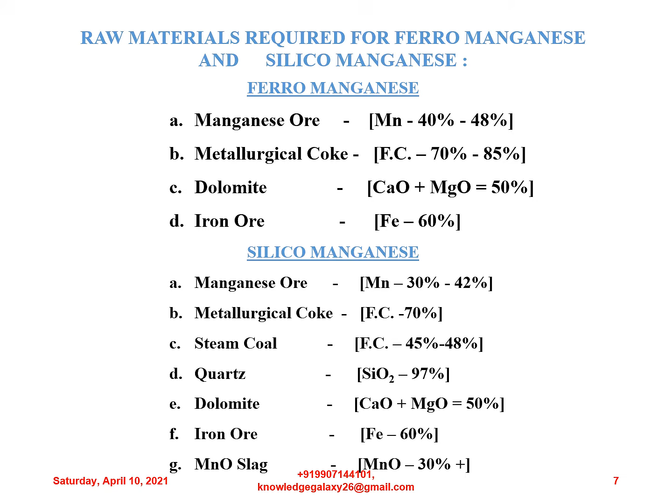manganese ore of manganese 30% to 42% is used. Metallurgical coke of fixed carbon minimum 70%. Steam coal of fixed carbon 45 to 48% is used. Quartz, SiO2 minimum 97%. Dolomite, CaO plus MgO total minimum 50%. Then iron ore of minimum iron 60%. High MnO slag, MnO minimum 30% plus, is used.

So friends, raw materials used for high carbon ferromanganese or silicomanganese production. These are manganese ores of the following grades. First grade, 46 to 49% manganese. Second grade, 42 to 46% manganese. Third grade, 35 to 42% manganese. While selecting the manganese ore, the average Mn/Fe ratio of the blend is kept between 4.2 to 5.5.

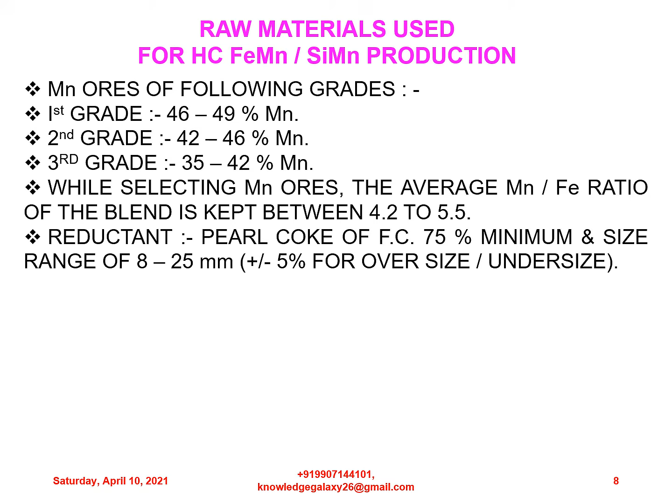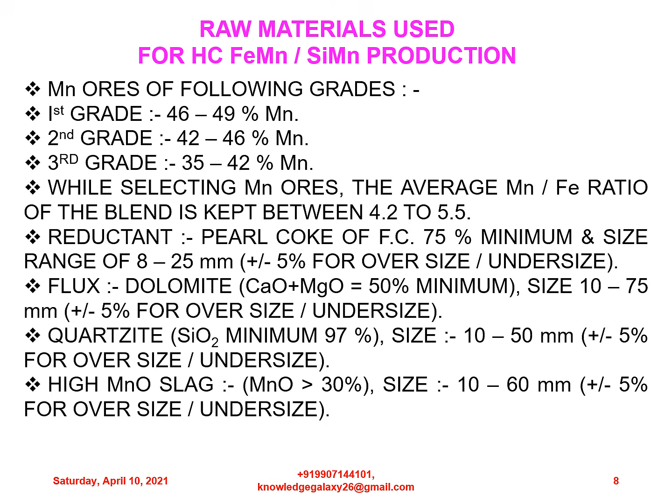Reductant: pearl coke of fixed carbon 75% minimum and size range of 8 to 25 mm, plus minus 5% for oversize or undersize. Flux: dolomite is used as a flux, CaO plus MgO minimum 50%, size 10 to 75 mm, plus minus 5% for oversize or undersize. Quartzite, SiO2 minimum 97%, size 10 to 50 mm, plus minus 5% for oversize or undersize. High MnO slag, MnO more than 30%, size 10 to 60 mm, plus minus 5% for oversize or undersize.

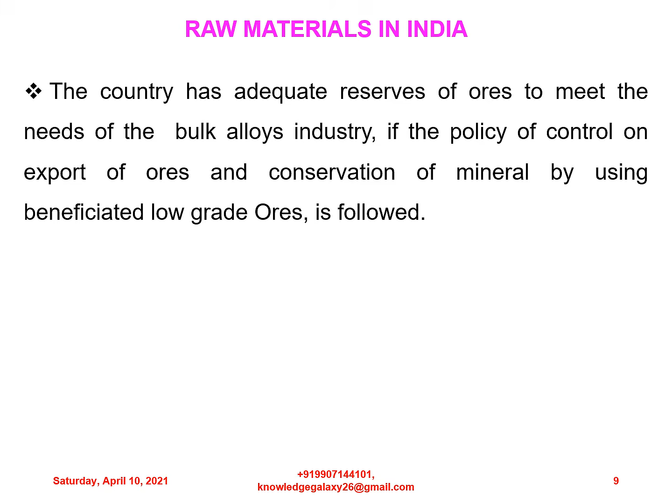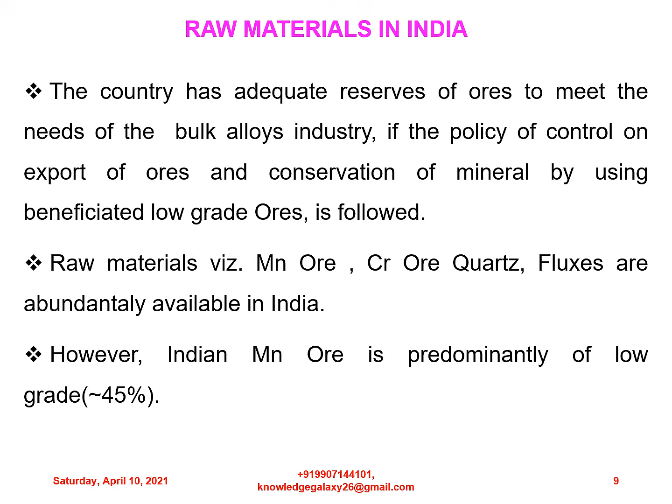Raw materials in India. The country has adequate reserves of ores to meet the needs of the bulk alloys industry if the policy of control on exports of ores and conservation of mineral by using beneficiated low-grade ores is followed. Raw materials like manganese ore, chrome ore, quartz, and fluxes are abundantly available in India. However, Indian manganese ore is predominantly of low grade, equivalent to 45%.

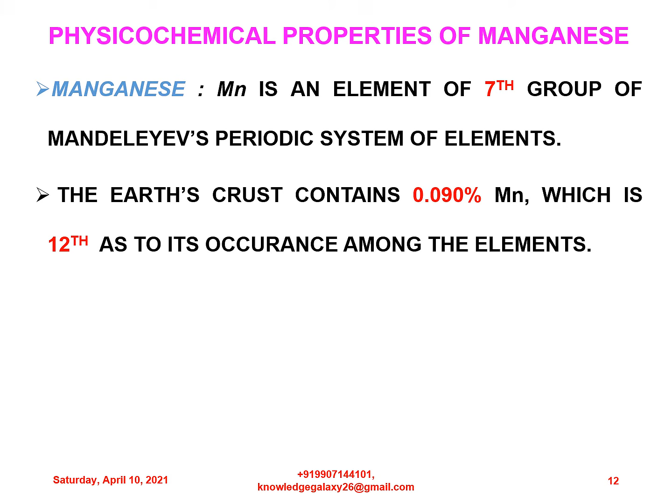Let us now discuss something about physico-chemical properties of manganese. Manganese is an element of the 7th group of Mendeleev's periodic system of elements. The Earth's crust contains 0.090% of manganese, which is 12th as to its occurrence among the elements. Manganese is not found in elementary state in nature and occurs only in the form of compounds with other elements. These are mainly oxides, carbonates, and silicates.

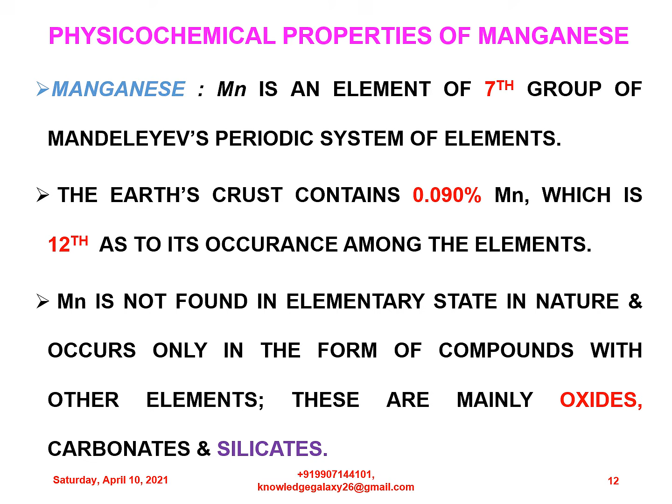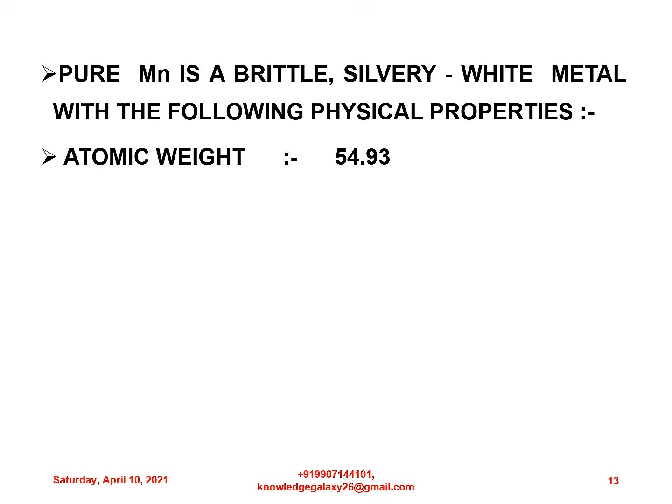Pure manganese is a brittle, silvery white metal with the following physical properties. Atomic weight is 54.93, specific gravity is 7.2, melting point is 1244 degrees Celsius, boiling point is 2150 degrees Celsius, valency is from 2 to 6. Manganese possesses a very strong affinity to oxygen and sulfur.

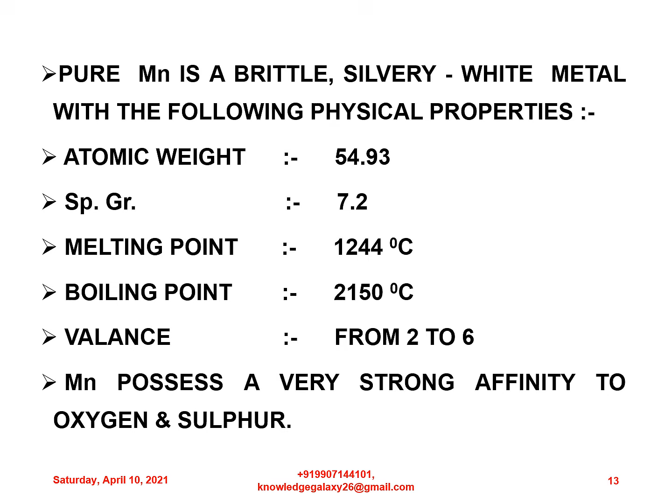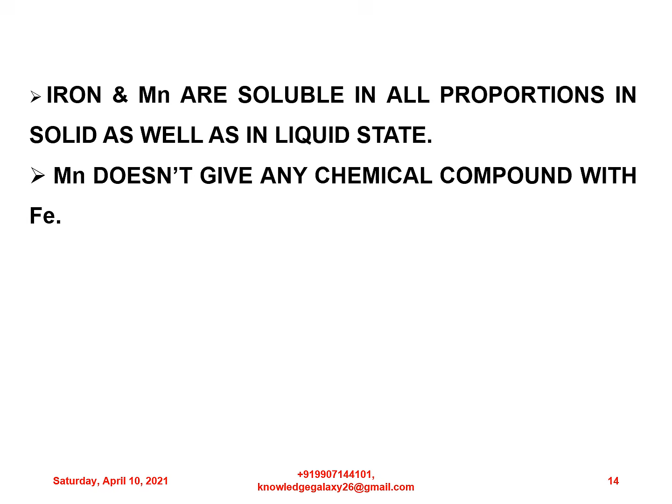Iron and manganese are soluble in all proportions in solid as well as in liquid state. So it can be said that iron and manganese are very much close friends. Manganese doesn't give any chemical compound with iron. Manganese combines with carbon to give a stable carbide, that is Mn3C. Mn3C and liquid manganese are soluble in all proportions.

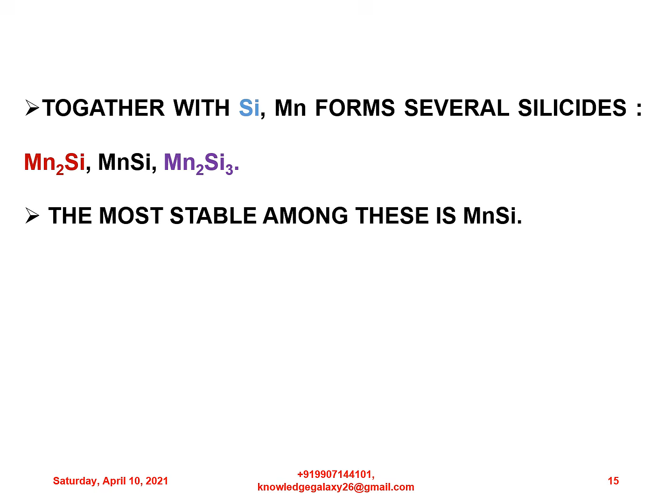Together with silicon, manganese forms several silicides: Mn2Si, MnSi, Mn2Si3, etc. The most stable among these is MnSi. Silicides of manganese are stabler compounds than Mn3C, since the heat of formation of MnSi from the elements is 14,000 calories, while that of Mn3C is 3,600 calories.

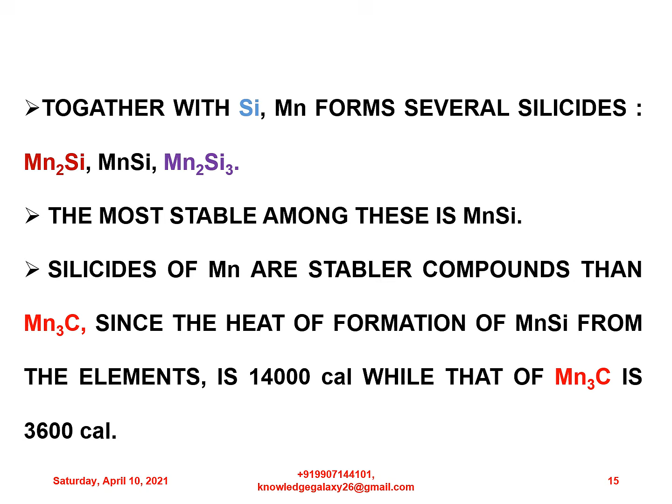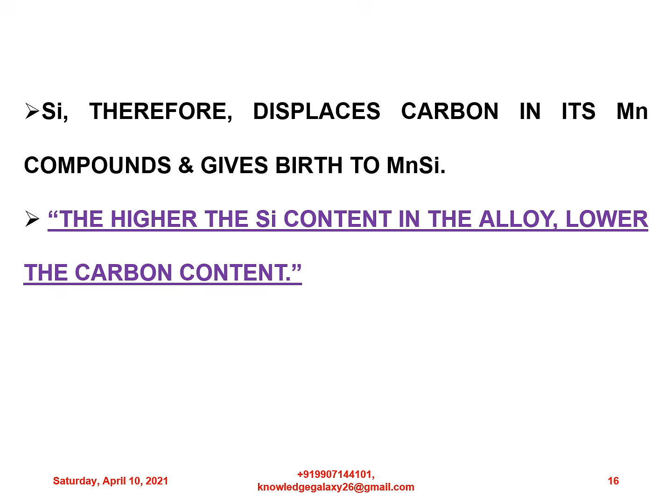Silicon therefore displaces carbon in its manganese compounds and gives birth to MnSi. The higher the silicon content in the alloy, the lower the carbon content. My dear friends, this is the principle governing production of silicomanganese and ferromanganese with low carbon content. So you should always remember this.

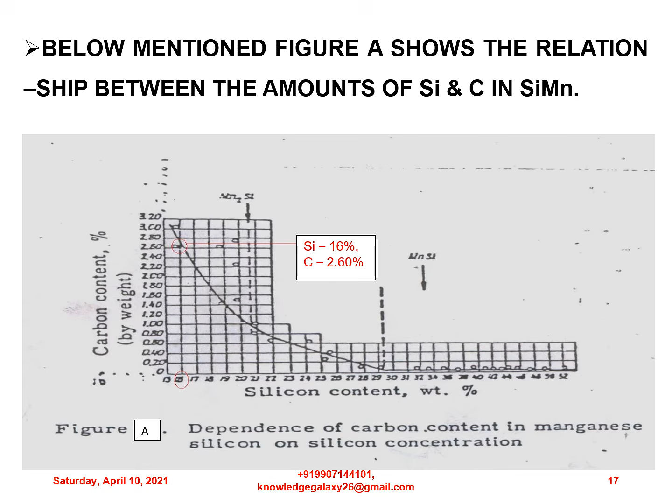This graph shows the relationship between silicon and carbon in the silicomanganese. As can be seen, the optimum silicon content, that is 16%, carries carbon up to 2.6% maximum. Manganese forms 4 compounds with oxygen: manganese monoxide MnO, manganese protoxide Mn3O4, manganese oxide Mn2O3 and manganese dioxide MnO2.

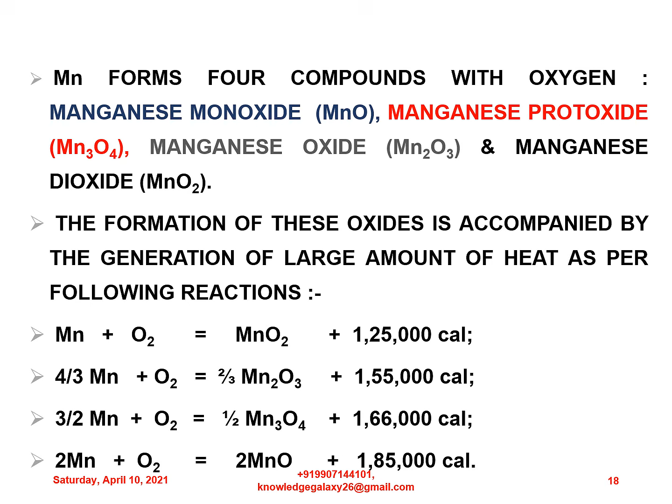The formation of these oxides is accompanied by the generation of large amount of heat as per the following reactions. First, Mn + O2 = MnO2 + 1,25,000 calories. 4/3 Mn + O2 = 2/3 Mn2O3 + 1,55,000 calories. 3/2 Mn + O2 = 1/2 Mn3O4 + 1,66,000 calories, and 2 Mn + O2 = 2 MnO + 1,85,000 calories.

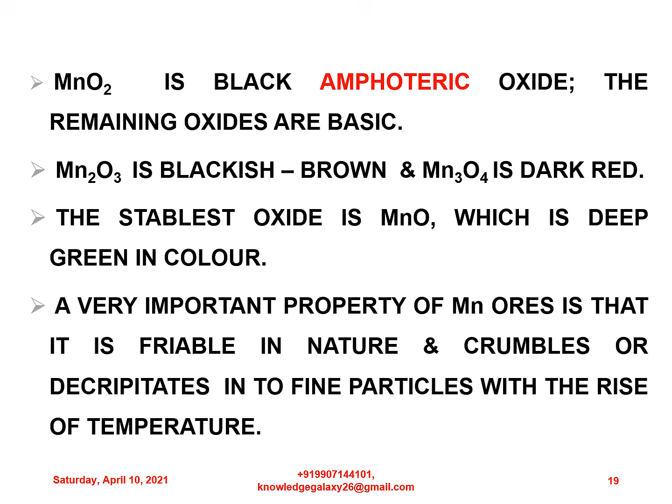MnO2 is a black amphoteric oxide. The remaining oxides are basic. Mn2O3 is blackish brown and Mn3O4 is dark red in color. The stablest oxide is MnO, which is deep green in color. A very important property of manganese ores is that they are friable in nature and crumble or decrepitate into fine particles with the rise of temperature.

The former Soviet Union accounts for more than 50% of the world's reserves of manganese ores. The largest deposits of these ores are in the Chiatura area in the Caucasus and the Nikopol area in Ukraine. It should be stressed that manganese ores are one of the chief sources of raw materials used in extractive metallurgy. Over 90% of the world manganese ore output goes to the metallurgical industry.

The main manganese minerals are: pyrolusite MnO2, a mineral black in color. Second, manganite Mn2O3.H2O, it is steel grey in color. Third is psilomelane MnO, BaO, CaO, MgO·MnO2·nH2O. This is light steel in color. Hausmannite Mn3O4, which is brown to black in color. Braunite Mn2O3, it is brown to black in color.

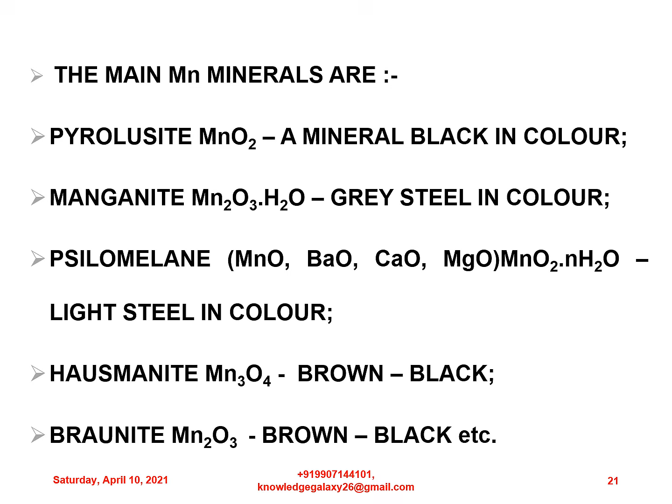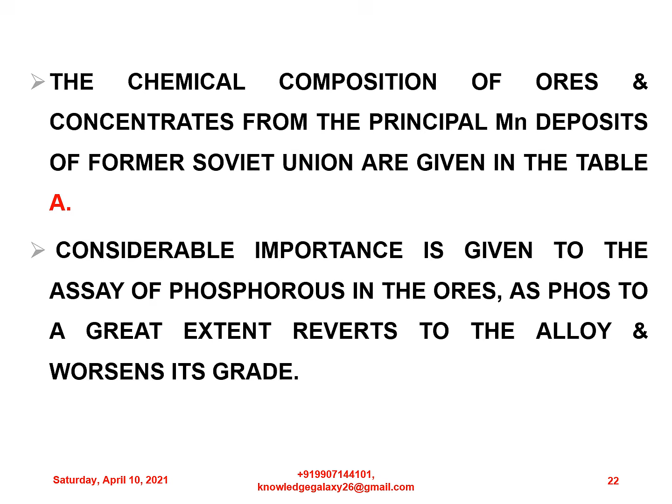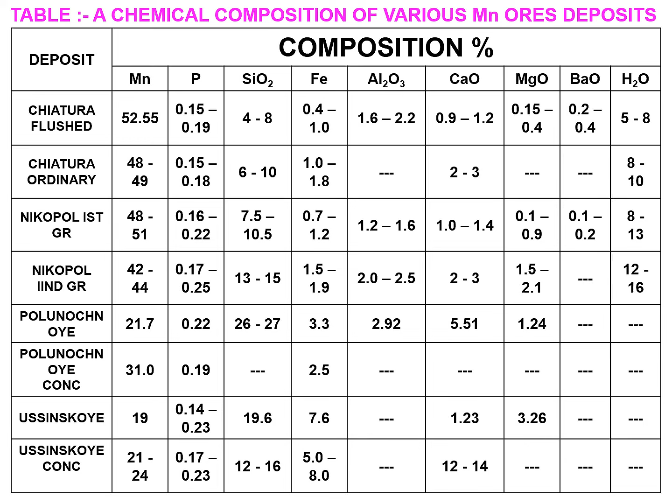The chemical composition of ores and concentrates from the principal manganese deposits of the former Soviet Union is given in the table. This is basically for theoretical importance and extra knowledge sharing. Considerable importance is given to the assay of phosphorus in the ores, as phosphorus to a great extent reverts to the alloy and worsens its grade. This table basically shows the chemical composition of various manganese ore deposits. So the details you can see in this slide.

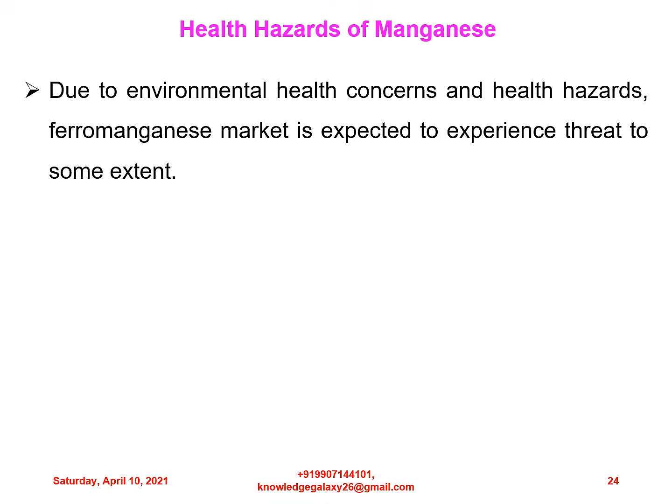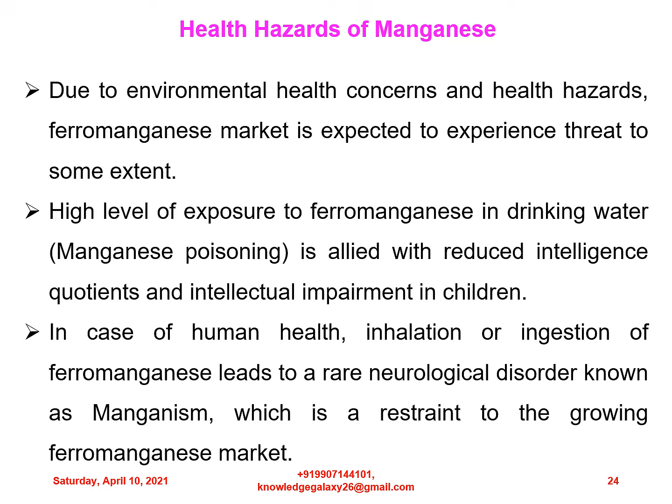So let us now discuss something about health hazards of manganese. Due to environmental health concerns and health hazards, the ferromanganese market is expected to experience threat to some extent. High level of exposure to ferromanganese in drinking water, that is called manganese poisoning, is allied with reduced intelligence quotient and intellectual impairment in children. In case of human health, inhalation or ingestion of ferromanganese leads to a rare neurological disorder known as manganism, which is a restraint to the growing ferromanganese market.

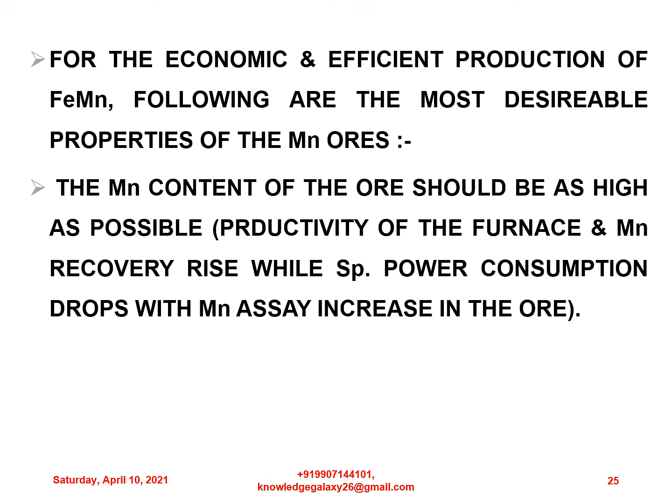For the economic and efficient production of ferromanganese, following are the most desirable properties of the manganese ore. The manganese content of the ore should be as high as possible. Productivity of the furnace and manganese recovery rise while specific power consumption drops with the manganese assay increase in the ore. Second, Mn/Fe ratio should be as high as possible. This is one of the prime factors that determines the grade and quality of manganese ore.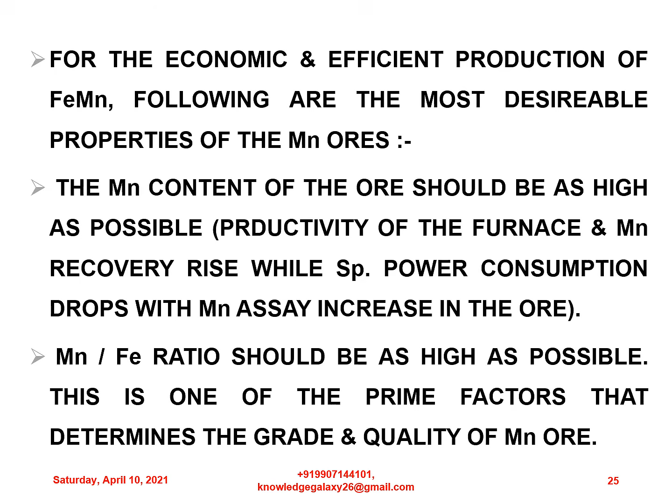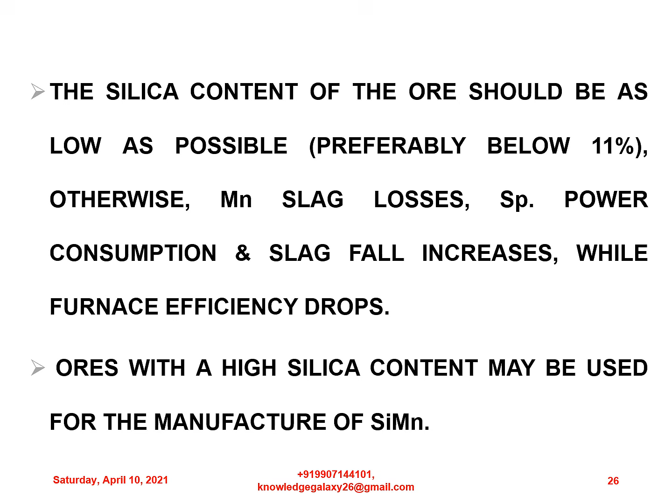The silica content of the ore should be as low as possible, preferably below 11%. Otherwise, manganese slag losses, specific power consumption, and slag fall increase while furnace efficiency drops. Ores with a high silica content may be used for the manufacture of silicomanganese. Ordinary manganese ores are used for the manufacture of metallic manganese in electric furnaces, while only very rich and pure uncontaminated manganese ores may be used for the aluminothermic method.

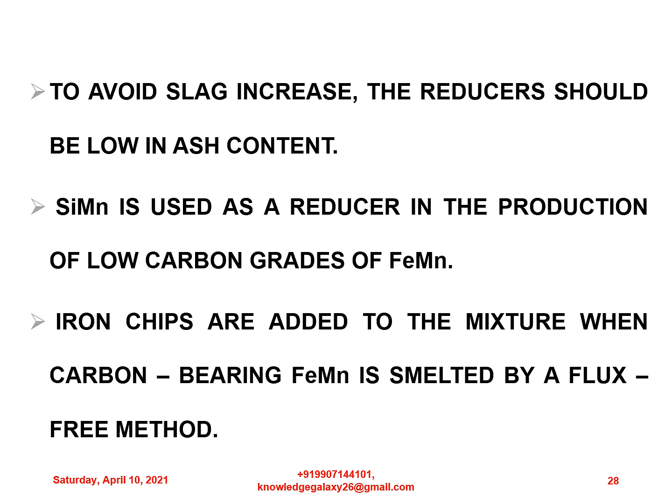Fine metallurgical coke and coal are used as reducers in the smelting of carbon ferromanganese and silicomanganese. Quartzites are used in the manufacture of silicomanganese to ensure a standard silicon content in silicomanganese. To avoid slag increase, the reducers should be low in ash content. Silicomanganese is used as a reducer in the production of low carbon grades of ferromanganese. Iron chips are added to the mixture when carbon bearing ferromanganese is smelted by a flux free method.

Let us now discuss about typical analysis of raw materials used in manganese alloys production. My dear friends, this table shows the major ore sources and their typical analysis, which is used for high carbon ferromanganese and high carbon silicomanganese production across various producers in India.

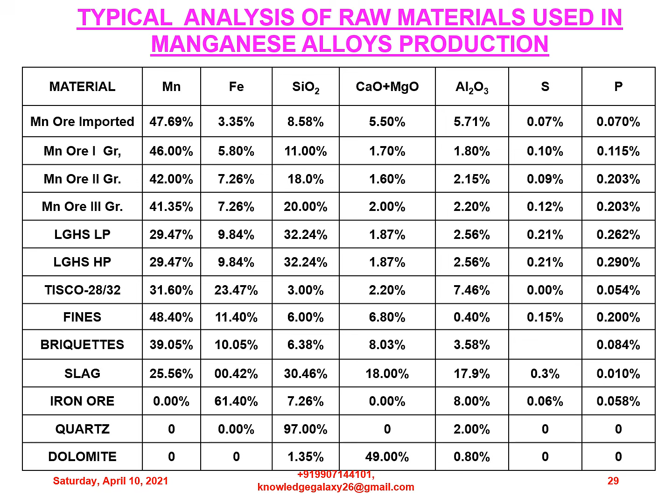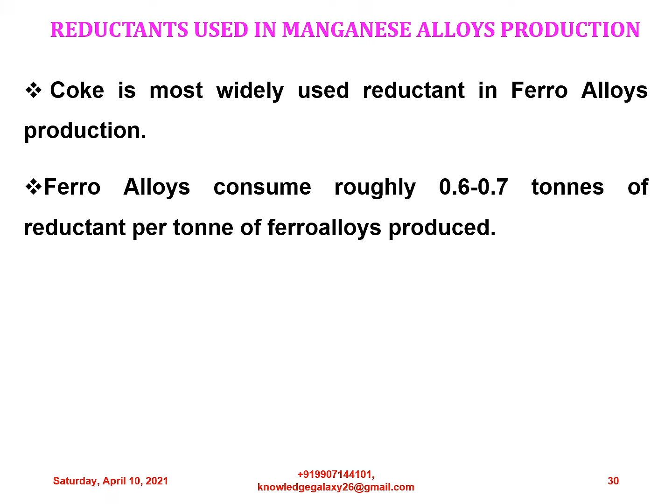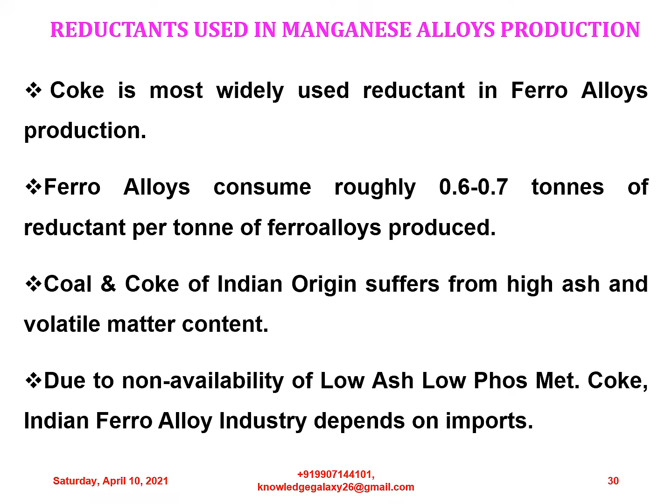Let us now discuss something about reductants used in manganese alloys production. Coke is the most widely used reductant in ferroalloys production. Ferroalloys consume roughly around 0.6 to 0.7 tons of reductant per ton of ferroalloys produced. Coal and coke of Indian origin suffer from high ash and volatile matter content. Due to non-availability of low ash, low phos metallurgical coke, the Indian ferroalloy industry depends on imports.

Stricter environmental controls in many countries have also put merchant coke batteries under long-term threat of closure. Increased demand for coke in China and curtailment of coke exports has led to shortage of coke in India. High and rising coke costs globally. This is also a very big threat for the Indian manufacturers.

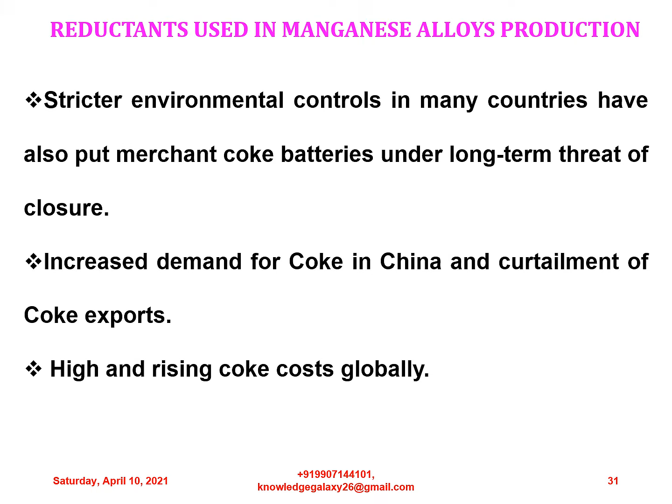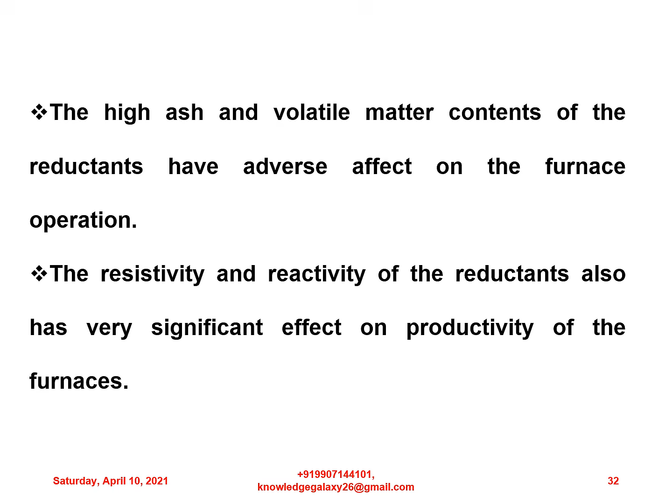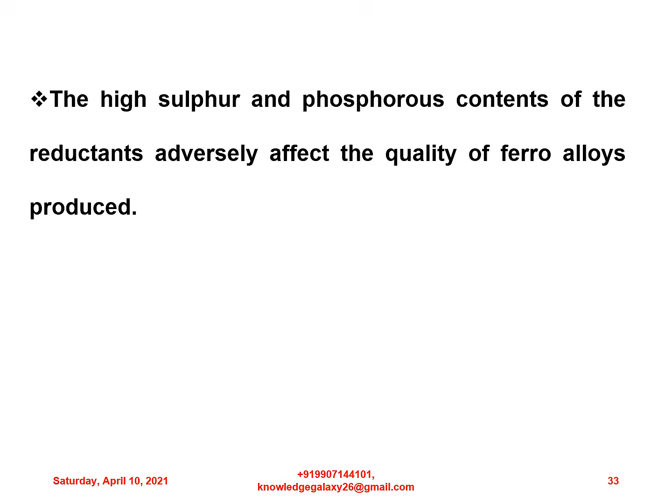The high ash and volatile matter contents of the reductants have adverse effect on the furnace operation. The resistivity and reactivity of the reductants also have very significant effect on productivity of the furnaces. The high sulfur and phosphorus contents of the reductants adversely affect the quality of ferroalloys produced. Metallurgical coke from steel plants and other coke making plants along with non-coking coal are used for the production of manganese alloys.

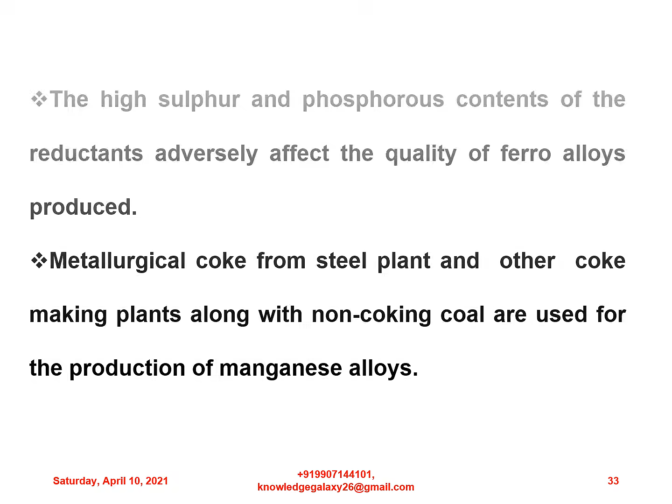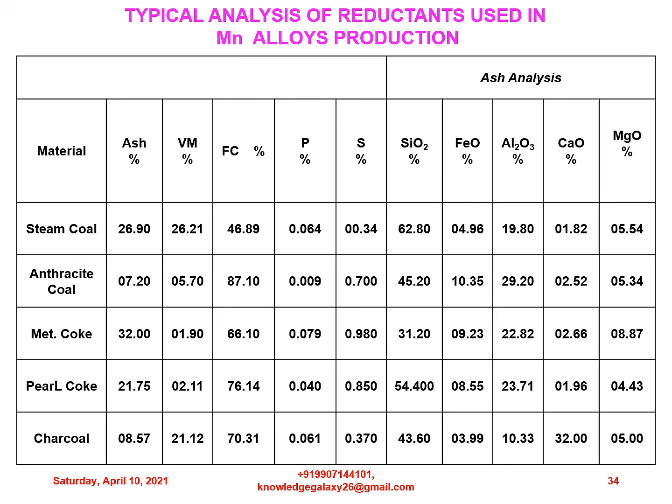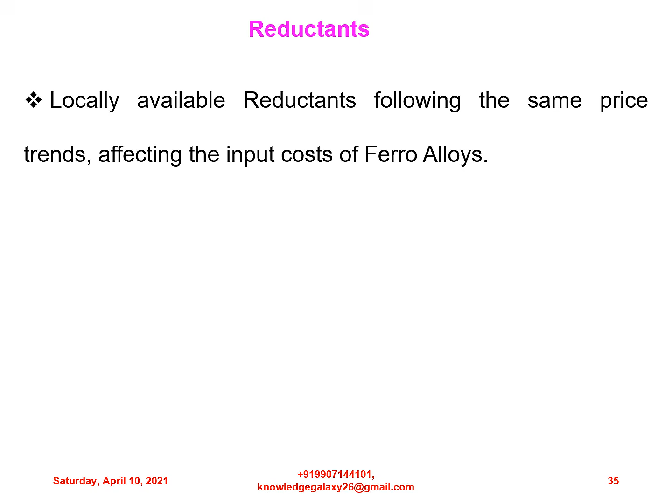Typical analysis of reductants used in manganese alloys production. My dear friends, this table shows the typical analysis of reductants used in manganese alloys production. Locally available reductants follow the same price trends, affecting the input cost of ferroalloys. It is a big threat since the cost of reductants is high and ever increasing. The Indian ferroalloys industry is further burdened by high level of import duty on coke and second anti-dumping duty on low phos met coke.